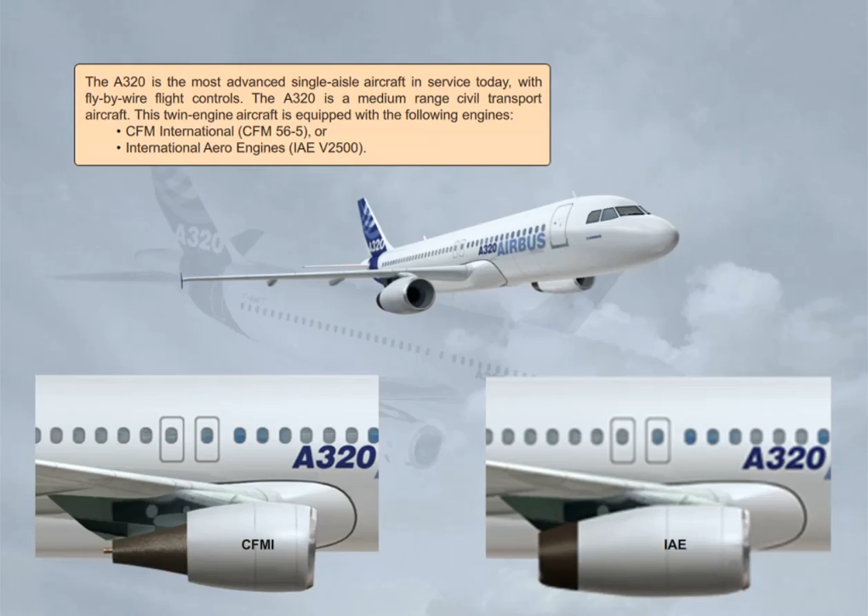Optionally, the A320 family can now be equipped with sharklets, allowing the performances to be improved by around 3.5%, so the range may be increased by around 100 nautical miles, or the payload may be increased by around 500 kilos or 1,100 pounds.

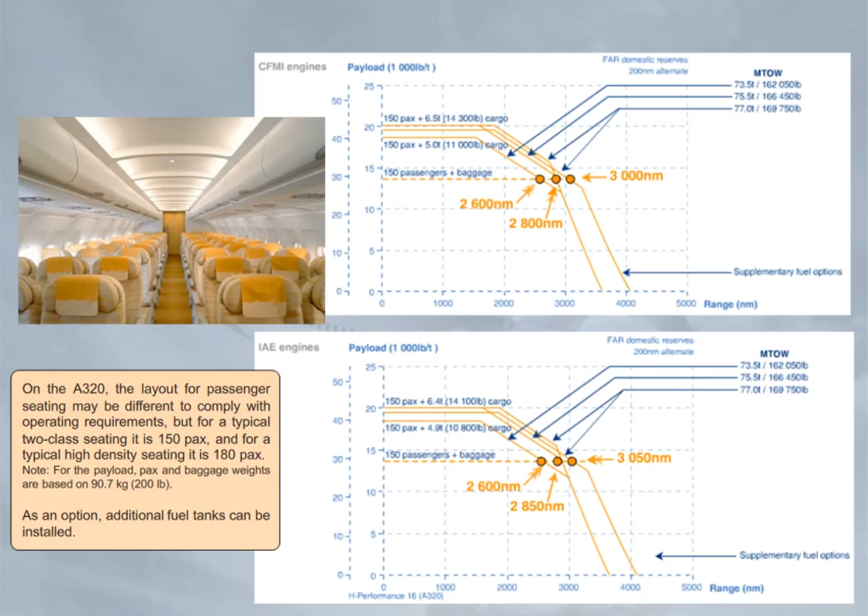On the A320, the layout for passenger seating may be different to comply with operating requirements, but for a typical two-class seating, it is 150 pax, and for a typical high-density seating, it is 180 pax. Note: for the payload, pax and baggage weights are based on 90.7 kilos or 200 pounds. As an option, additional fuel tanks can be installed. Please have a look at these dimensions.

The procedure to do a 180 degrees turn on the runway is in the standard operating procedures. In order to help the turn, asymmetrical thrust may be applied on the external engine and depends on the engine type. For CFM engine, around 50% to 55% of N1. For IAE engine, around 1.05 of EPR. A 180 degrees turn can be done by the CM2 too, but symmetrically.

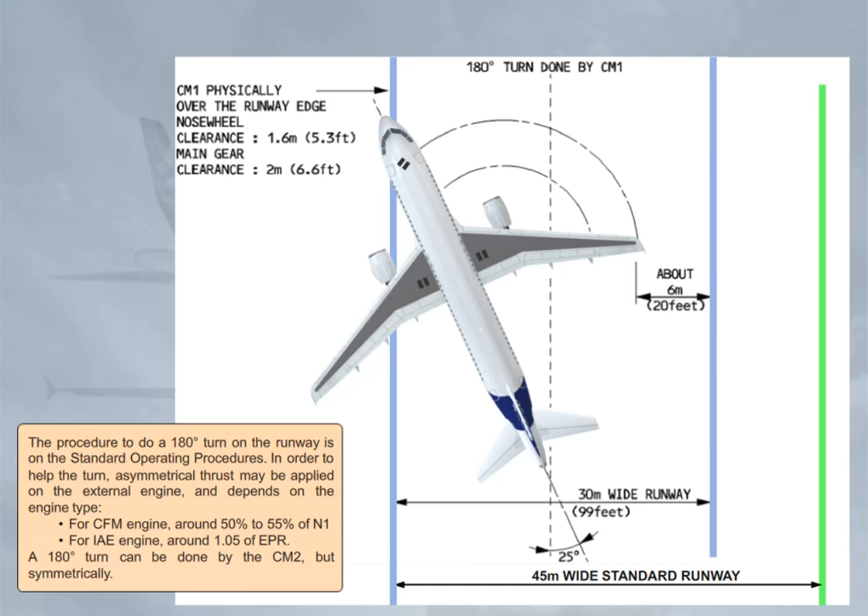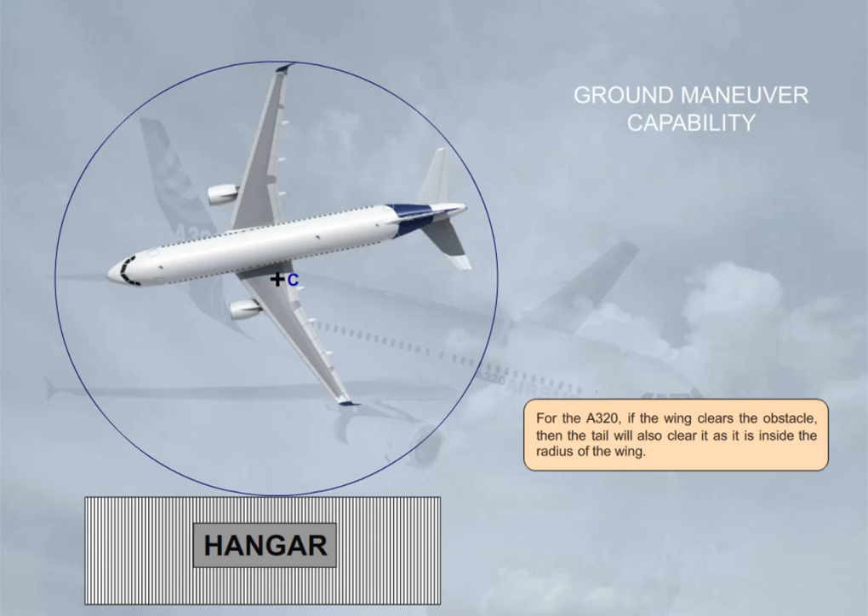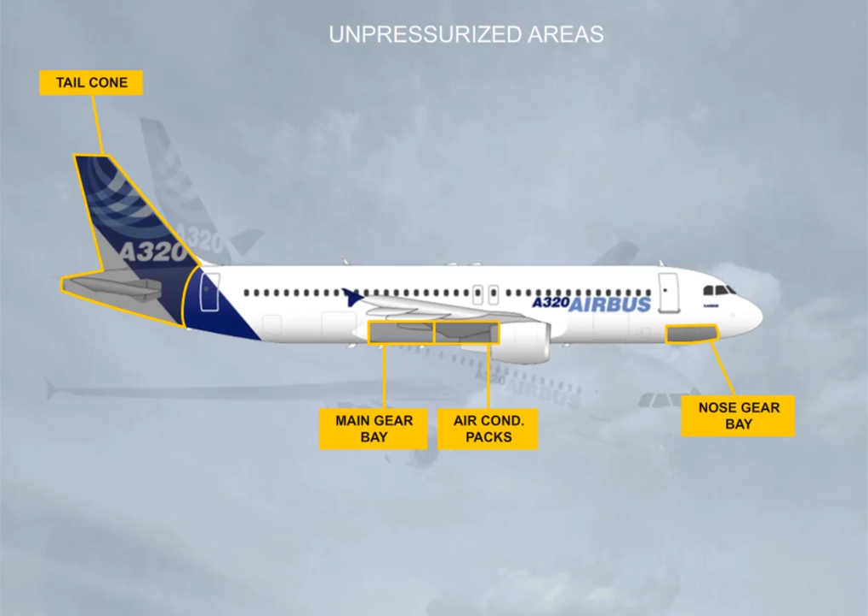For the A320, if the wing clears the obstacle, then the tail will also clear it, as it is inside the radius of the wing. The following areas are unpressurized: the tail cone, the main gear bay, the air conditioning packs, the nose gear bay, and the radome.

Let's briefly familiarize you with the location of the communication antennas: VHF-1, VHF-2, VHF-3, HF-1, and HF-2.

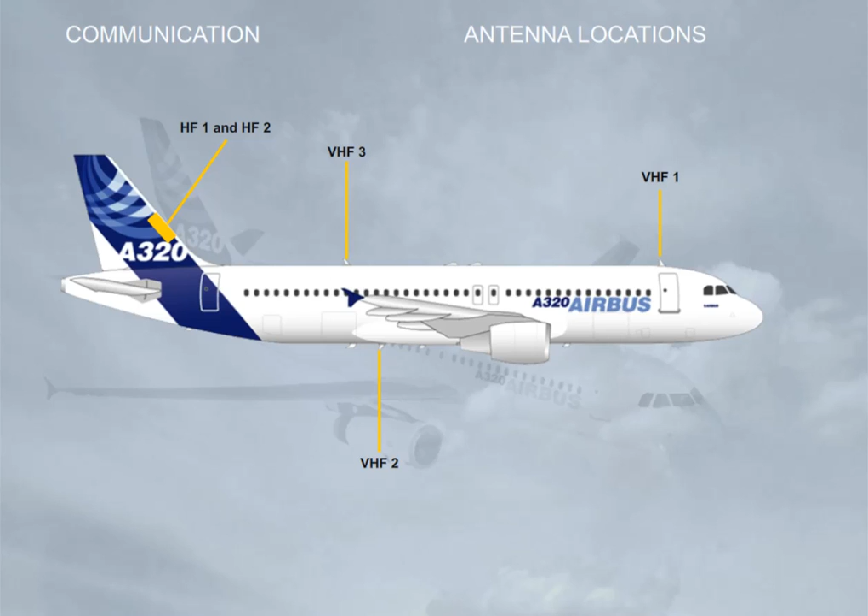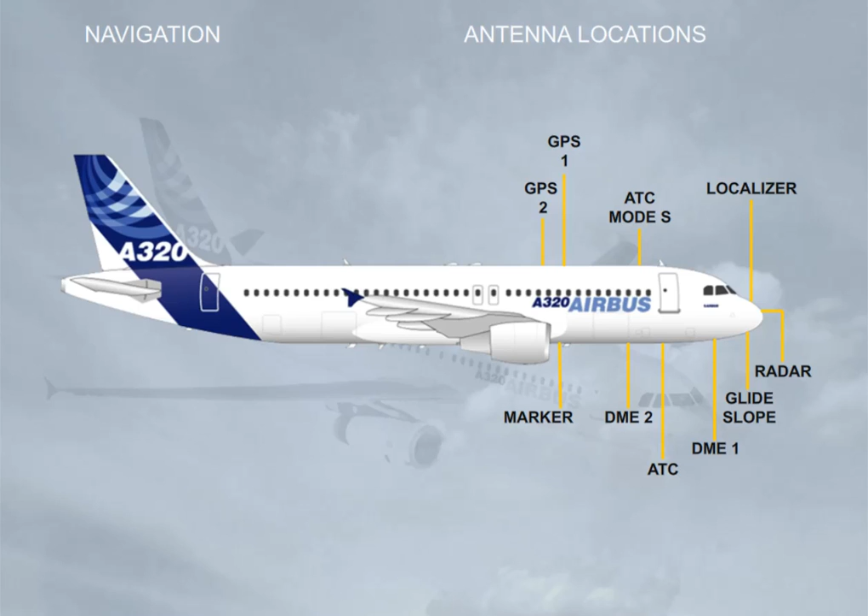Let's now have an overview of the location of the navigation antennas: radar, localizer, and glide slope, DME-1 and 2, ATC, GPS-1 and 2, marker, TCAS, ADF-1 and 2, radio altimeter, ELT, emergency locator transmitter, VOR-1 and 2.

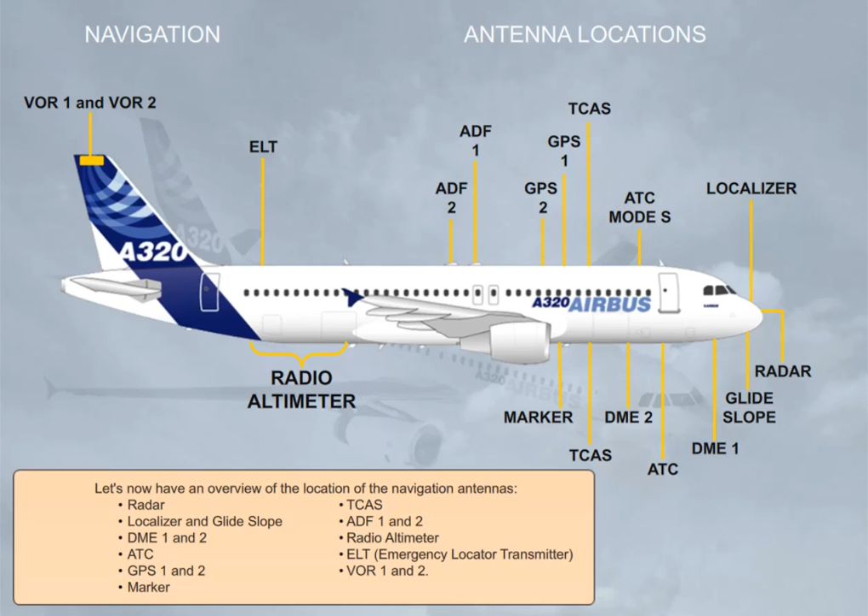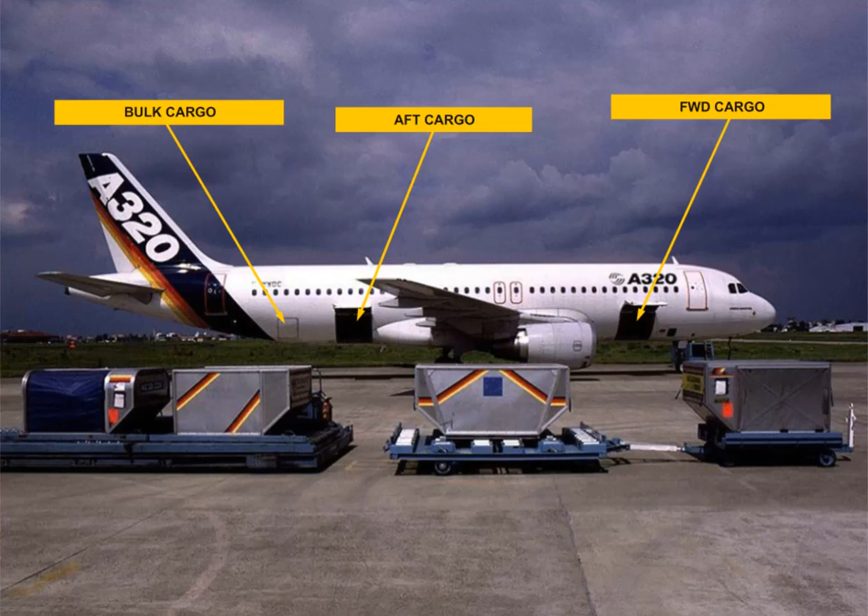There are 3 cargo compartments: a forward cargo compartment, an aft cargo compartment, and a bulk cargo compartment. The size of the fuselage accommodates standard containers. The cockpit is designed for a 2-member crew operation with 1 or 2 observer seats.

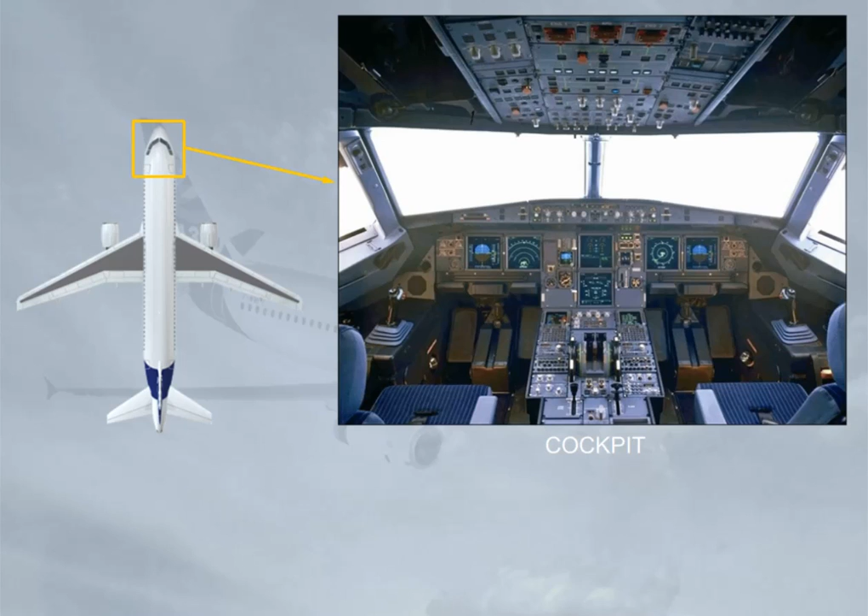The cockpit of the A320, a 2-man glass cockpit, is the most advanced cockpit of any civil airliner. It has an optimized layout of 6 LCD display units. The absence of control columns between the pilots and instruments ensures excellent visibility of all instruments. The system controls are located on an overhead panel in such a way that both crew members can monitor them.

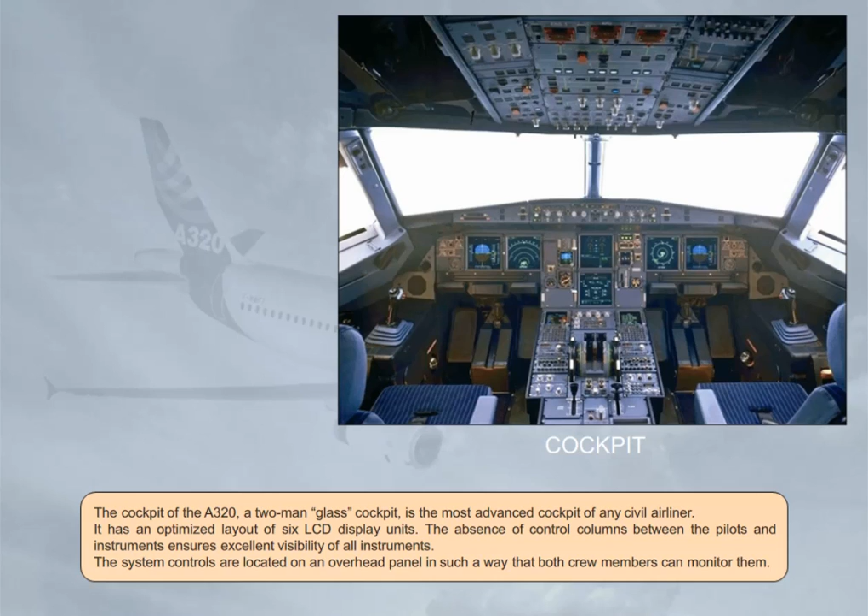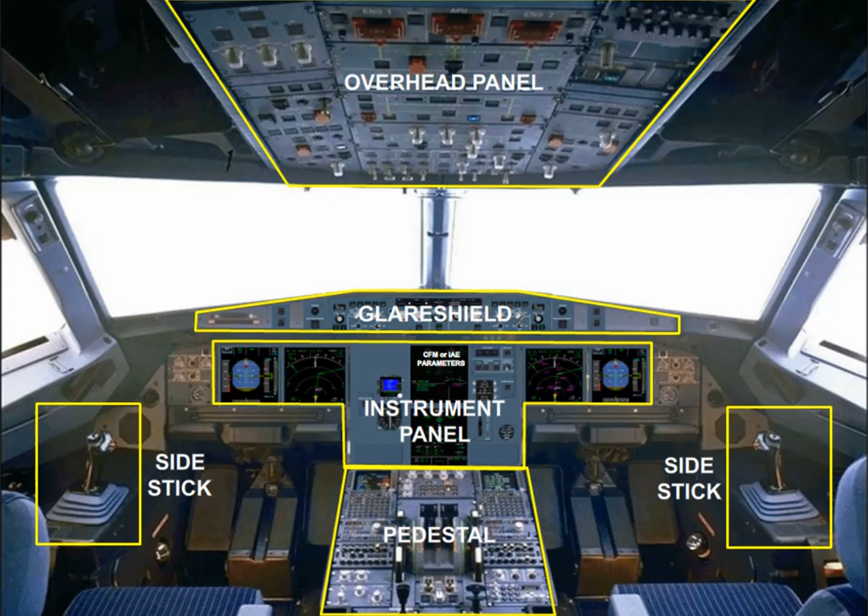The pilot seats are electrically or manually adjustable. All the seat adjustments will be shown during the simulator session. Click on the forward arrow to see the 5 elements in sequence. The overhead panel is used during the pre-flight to check that all the lights are out, dark cockpit philosophy, and in flight to carry out emergency or abnormal procedures.

The central part of the overhead panel is dedicated to the following aircraft systems: air conditioning, electrical, fuel, hydraulic, fire. Note, the most frequently used controls are at the bottom part, as shown. For a closer view, let's take the fuel panel. The related system name is written on the left and right side. For each system, there is a green schematic diagram. Notice all push-button switches are in lights-out configuration.

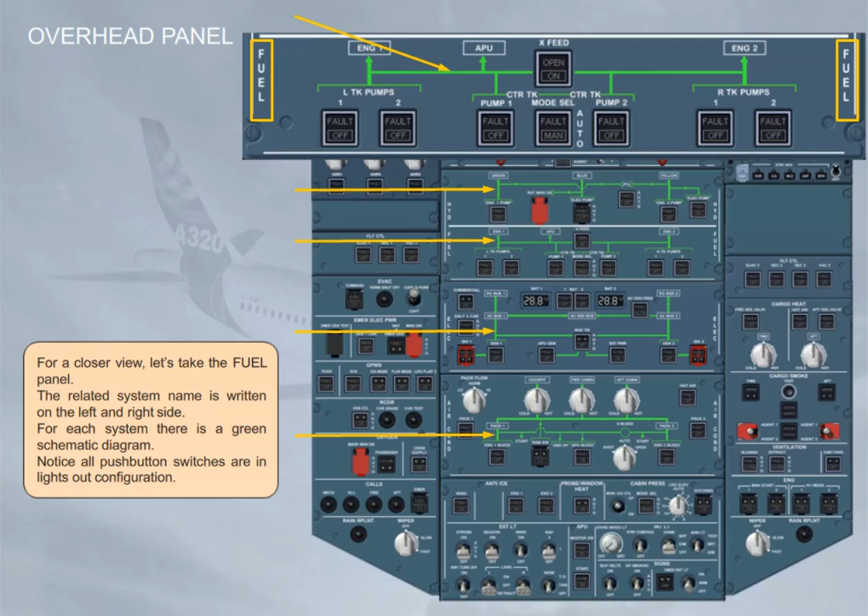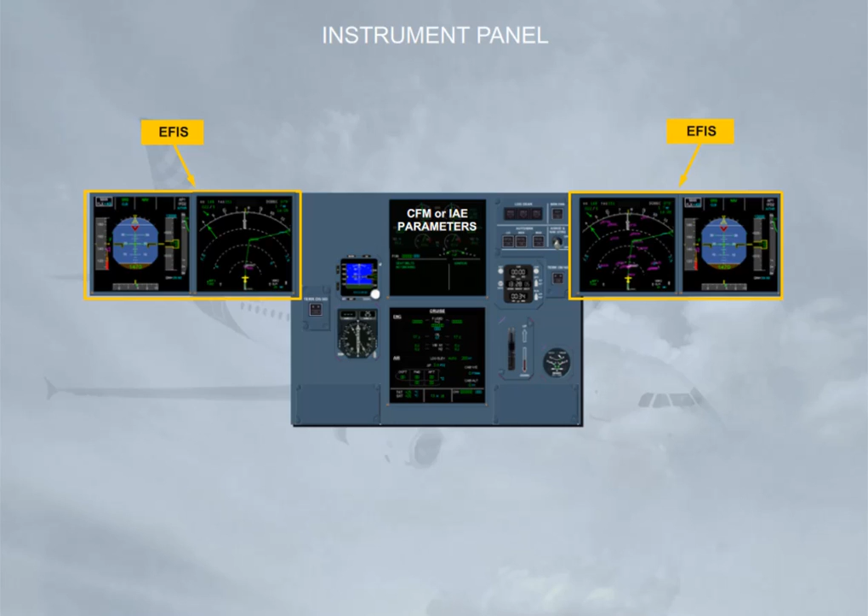The glare shield is used by the pilots for flight guidance and short-term flight management. It is also used to control the electronic flight instrument system, EFIS. The instrument panel gives the following information to the pilots: flight information through the electronic flight instrument system, EFIS, and integrated standby instrument system, ISIS. System information through electronic centralized aircraft monitoring, ECAM.

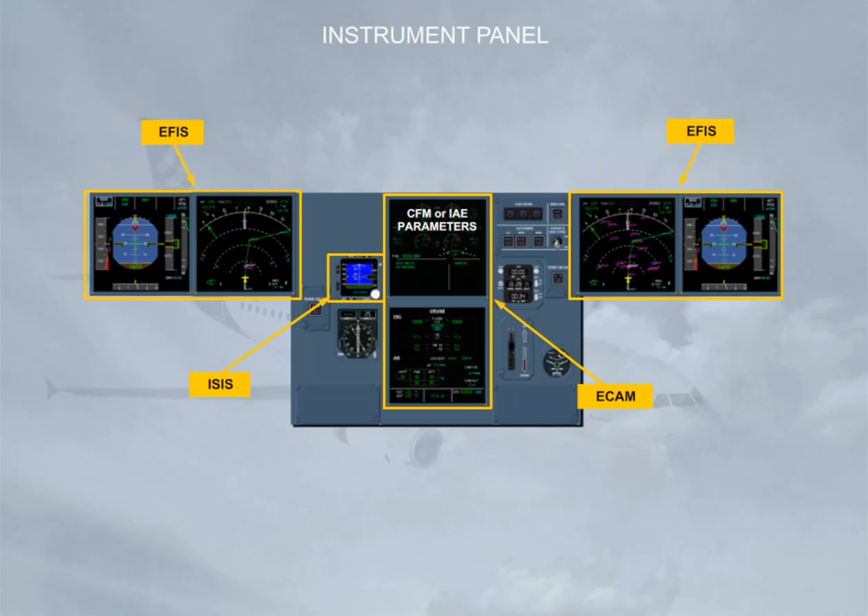Because these indications are only mentioned in a few areas of the ground school course, we will use blue boxes to indicate that the units may differ, depending on the choice of your airline. The green boxes mean that the information in this area of the screen is not mandatory to be shown for the related studied system. Of course, when the air conditioning or the fuel system is being studied, the appropriate unit values will be shown.

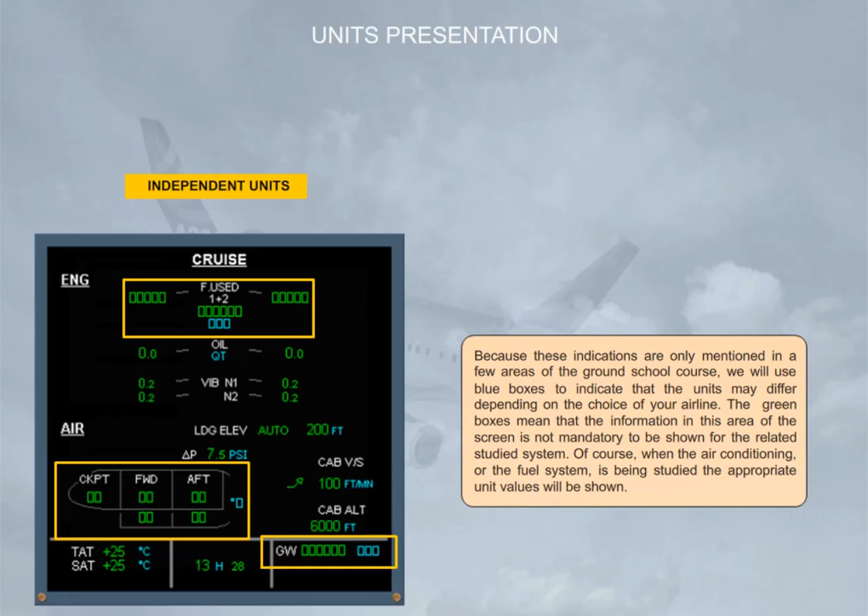The aircraft is flown manually, using either side stick. They are installed on the left and right-hand sides of the cockpit.